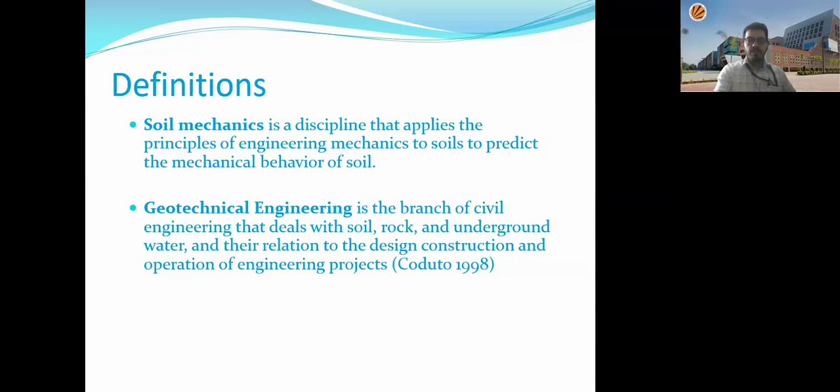So if we talk about a basic geotechnical project, we know there is a construction site. Whenever we want to construct any facility, it's the job of a geotechnical engineer to study the properties of soil. So what he does, he takes soil samples from the particular site, and takes those samples to the laboratory for testing.

After testing, he'll get some properties of the soil, and by using those properties, the geotechnical engineer will design or give some probable foundation analysis, or he'll do some kind of math here to come up with an idea that if we want to construct a particular facility, what should be the size of its foundation or the supporting structure.

Once these processes are complete, only then the structure can be built. So it's a cyclic process. So I'm repeating again. From a probable construction site, soil samples will be collected. These samples will be tested in the laboratory. Based on their test results, a design will be done, and that design will be forwarded to the execution team, and that execution team will actually build the structure on the particular site. This is the basic cycle of any geotechnical project.

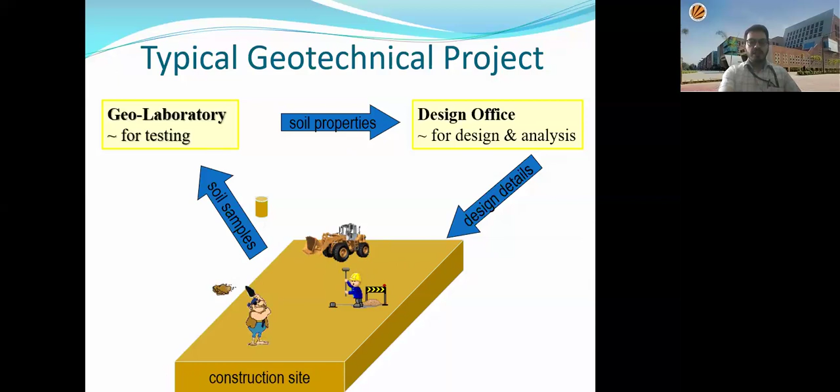Now, let us see some of the applications of the geotechnical field. So the very basic application is foundations. Foundations are what? They are the supports of the structure, and their role is to transfer the structural loads or the weight of the structure into the ground safely. Where the term safely means we don't want the foundation to break while supporting the structure, and we also don't want the soil on which this structure is resting to fail, right?

So this term safely means neither do we want the foundation to fail, nor do we want the soil to fail. So for this, we need foundations. So again, the role of foundation is to transfer the structural weights or loads into the ground safely. So foundations could be of different types. So here I've shown a simple shallow foundation. Shallow foundations, as the name suggests, are small foundations. The depth of these foundations is not very deep.

You can see in this image these small rectangular blocks underneath this simple structure, right? So their depth is not up to the bedrock. I hope you can see the soil profile here. So here, in this zone, you can see a firm ground. This is made up of soil, and underneath it, you have a bedrock. And these small squares that you see here represent the foundations. So here, the foundation is shallow, meaning the extent of these rectangles is not up to greater depths.

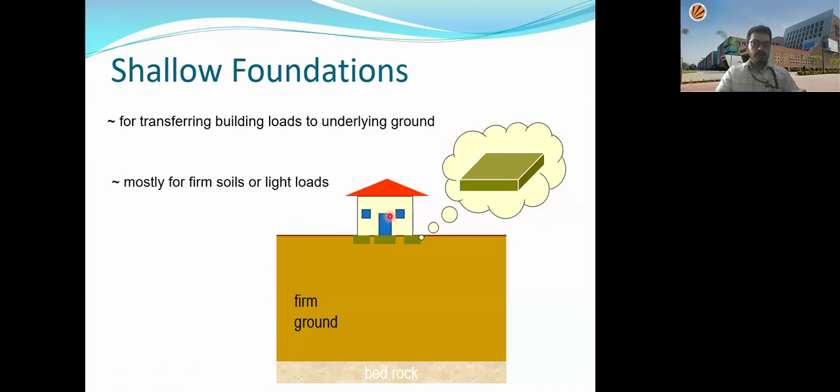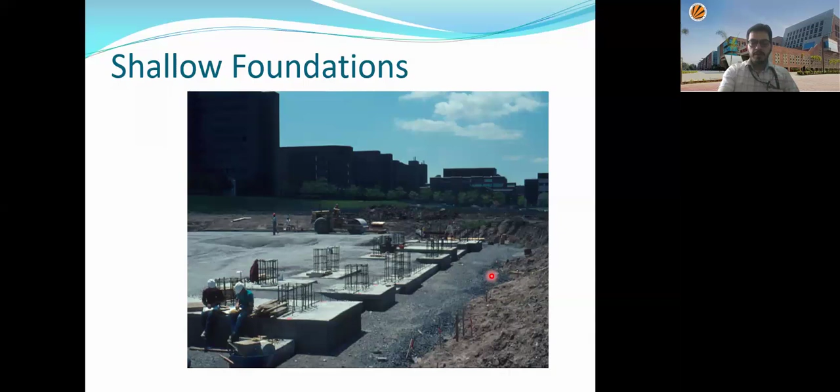And these types of foundations are provided if the weight or the size of the superstructure, in our case this particular house, is not too high. And this is the actual photograph showing the shallow foundation. You can see these foundations. These are examples of shallow foundations. And I hope most of you have seen these shallow foundations whenever there is any kind of construction activity going on around your neighborhood. So if you see here, the shallow foundation.

So this is an example of failure of foundation, and the example is from the Transcona grain elevator. You can see in the figure on the left the structure is stable, but the figure on the right shows the structure has failed. In fact, the structure has not failed, but the foundation has failed. You can see the structural integrity is still there, but the entire structure has tilted. So this tilting means the foundation has failed.

And this type of failure is known as the bearing capacity failure, or in other terms, the foundation was not able to support this structure. The weight of the structure was very high for the particular foundation. So it means we need to understand foundation systems. We need to be very careful while designing these shallow foundation systems.

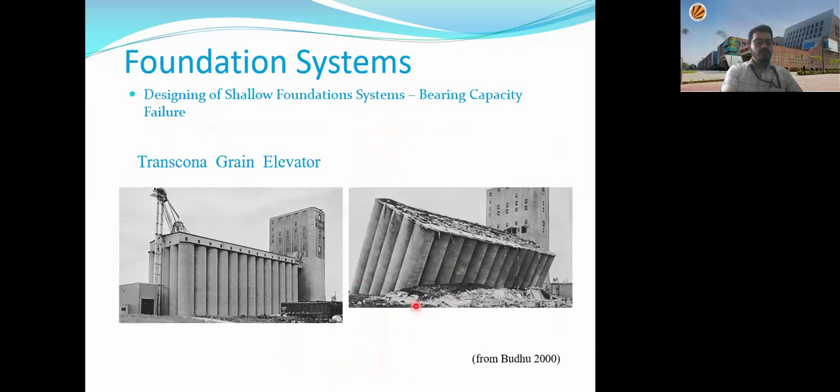Now we have other types of foundations, which are deep foundations, and these are required if we want to avoid these types of failure, because in this case the foundation was incapable of supporting the structure. It means we need to do something to support the structure. So instead of providing shallow foundations, we can provide deep foundations. The role of deep foundations is similar to shallow foundations. They support the superstructure and transfer the loads safely into the ground. But in this case, the loads are transferred to deeper depths, up to the bedrock.

You can see here these vertical lines. These vertical lines represent the foundation of this structure. And you can see the extent of these vertical lines is up to the bedrock. So the load of this superstructure is directly transferred to the bedrock here. And these vertical members, which we call foundations, are known as piles.

So these are vertical cylindrical members. These are very slender members, and their job is again to transfer the load of the superstructure into the ground safely without failing. Means these vertical members will not fail. Additionally, we don't want the soil to fail on which these members are installed.

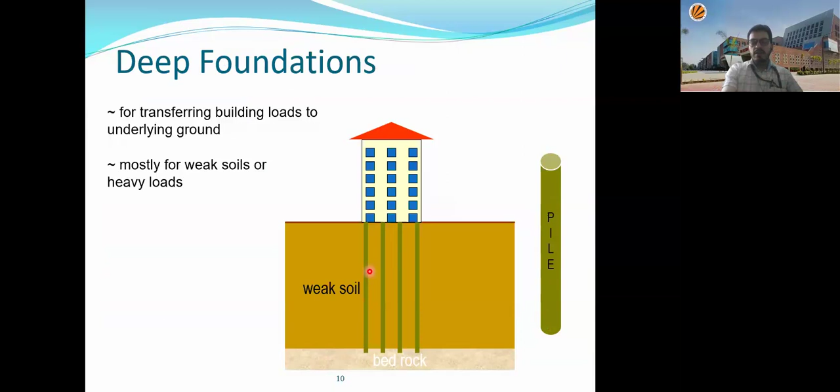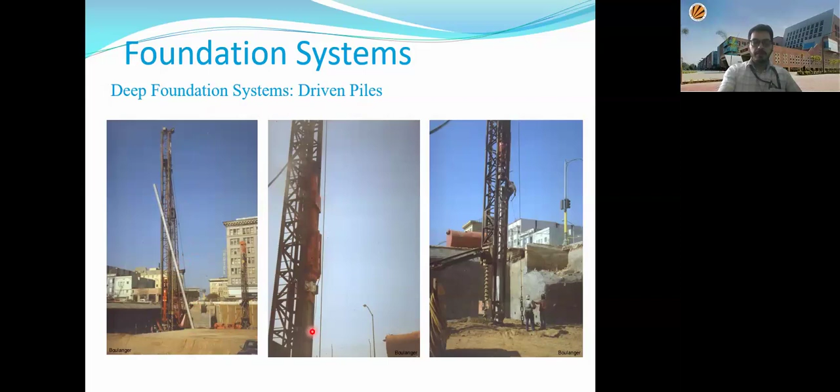And these are some other examples of driven piles. Here, these are timber piles. Okay. So now you must be wondering why I've used the term timber piles here. Depending upon the type of material that we use, piles can be classified. These foundations can be classified. So these could be made out of concrete, which is basically a mixture of cement, sand, and aggregates with water. These could be made of timber, as we can see here, or we can use steel piles. It depends upon the designer, and it also depends upon the cost and availability.

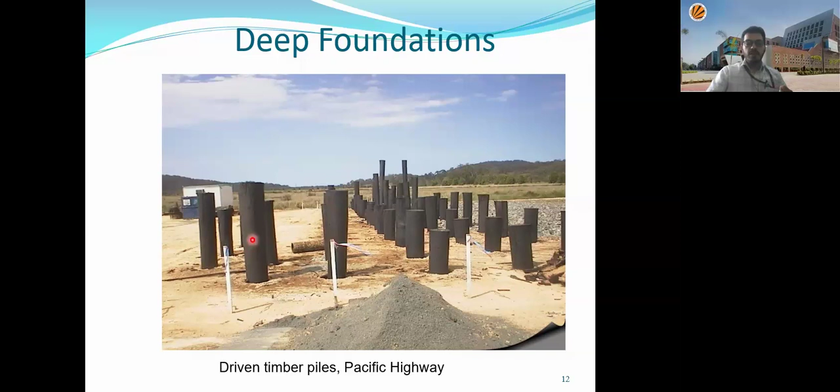Then if we want to install piles or cast piles into the ground itself, means we don't want to use ready-made piles, we want to construct the pile in its place of location. So for that, we need drilled shafts. Means we first have to create a borehole in the ground, and then we'll insert the reinforcement, which is made up of steel bars tied together, and then we'll fill that hole with concrete, which is basically a mixture of cement, sand, and aggregates with some moisture or water content.

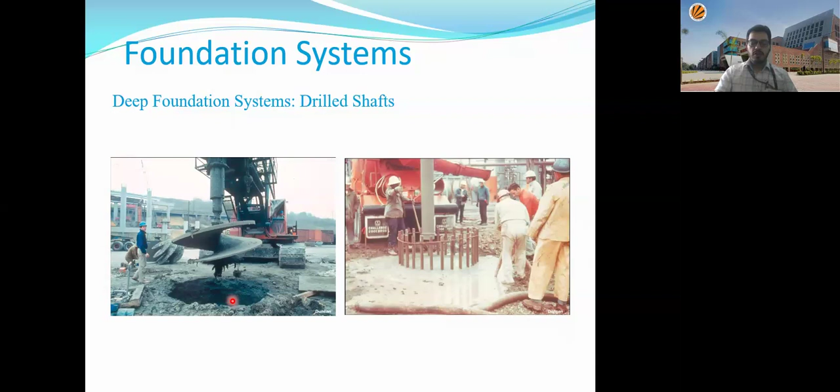Okay? And another example of retaining walls is in hilly regions. Whenever you go to any hilly region and you're going along a road, you will see on the hillside that there are some walls constructed, and their objective is simply to prevent the flow of hillside soil. So they are also preventing the movement of soil which is on the hillside, on the higher side. Those are also retaining walls. So again, the objective of a retaining wall is simply to prevent lateral spreading.

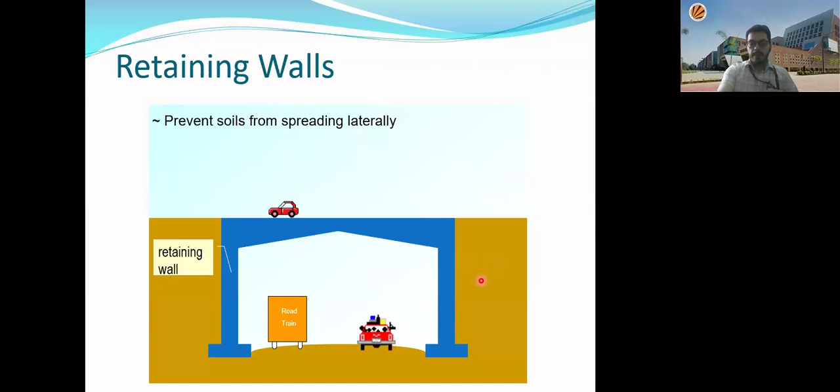Geosynthetics. We use geosynthetics. There are different types of reinforcement. There is not only one single type of reinforcement. There are multiple types of reinforcements, and sometimes we use them for some other purposes like containment. We'll discuss all these things later in this lecture.

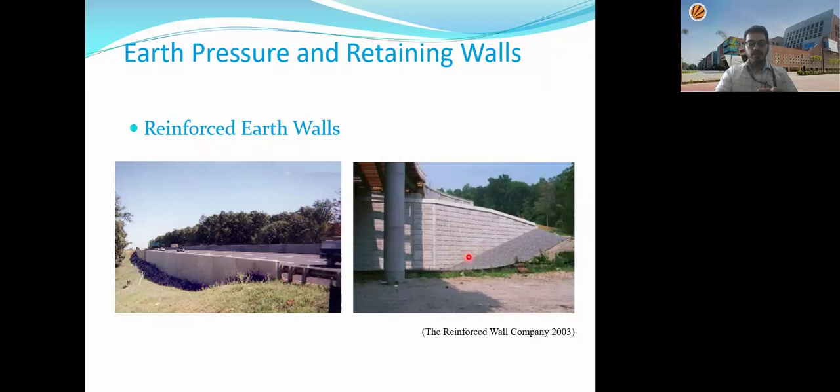We'll fill that mesh with this locally available gravel, and we'll have a bigger sized element which is similar to a brick, but it is contained inside a mesh. And then we'll place these members over one another and make a continuous wall. You must have seen these walls in hilly regions, on highways going through hills. And their objective is to stop the lateral spread of soil to prevent landslides. Lateral spread is actually happening because of landslides.

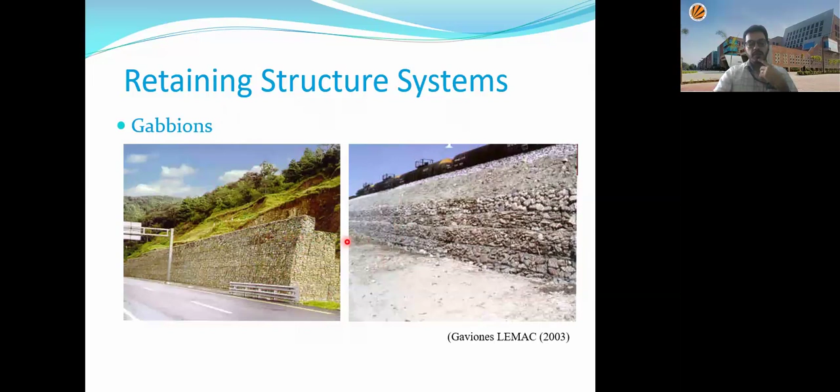Then we have tiebacks. This is another way of providing retaining structures. Tiebacks are simply inserting some nails into these walls, and they go through this wall plus into the soil behind the walls. By doing so, it will increase the density of the soil. By increasing the density of soil, the lateral spread of soil again decreases. So this is the purpose of providing tiebacks.

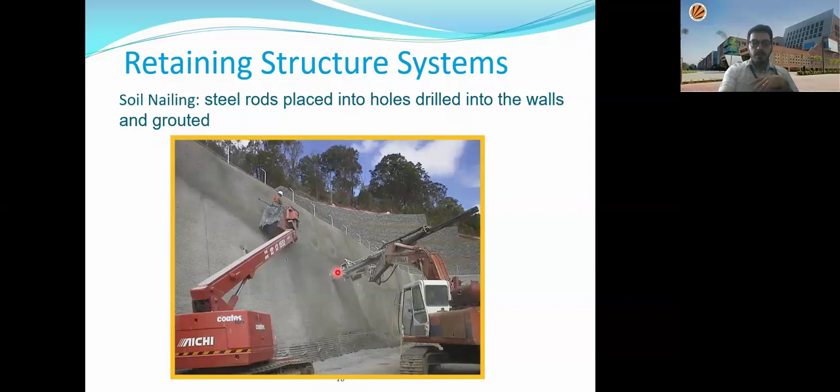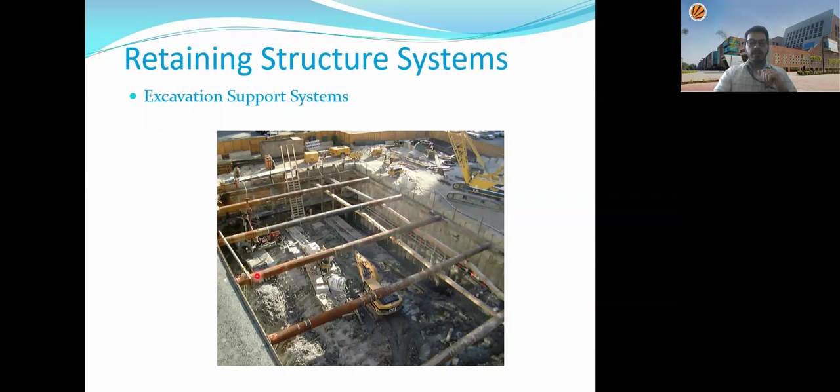And sometimes we use excavation support systems to protect against lateral spread, and these are temporary. These systems are basically used in urban areas when there are very big buildings nearby and we need to do excavations. If we do excavations without providing these excavation support systems, the sides would cave in, and it's very dangerous to the people working inside the excavated region. So we want to protect these vertical sides from caving, and for that we provide excavation support systems.

And one more type of retaining system is sheet piles. These are similar to piles, but these are sheets. Their purpose is simply to retain water on one side and earth on the other side. Depending upon the material, they could be steel, timber, or concrete. But we avoid concrete sheet piles because, due to water movement, we want the structure to be slightly flexible, and concrete is not that flexible. So we generally use steel and timber.

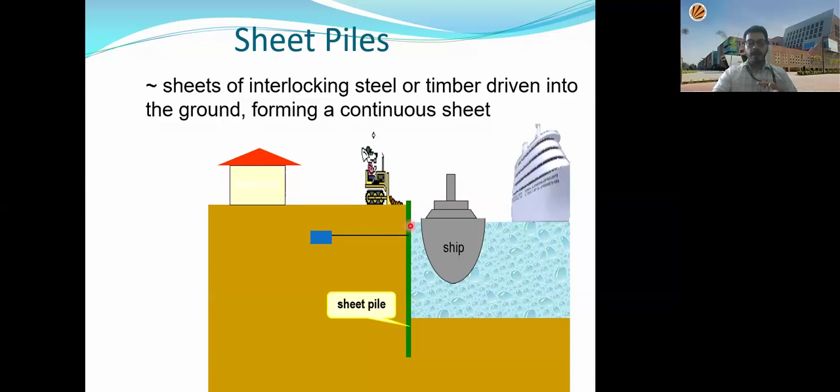These are some other examples of sheet piles. You can see water on the other side, and here the water level is different, right? So from both sides, the water level is different. And these sheet pile walls are for temporary works only. These are not permanent structures, these are temporary structures.

So in case we want to construct anything in a river body or a water body, we first use sheet piles, and then we pump out the water from the center so that the bed of the river or water body gets exposed, and then we can do the construction procedure. Once the construction is complete, we remove these sheet piles.

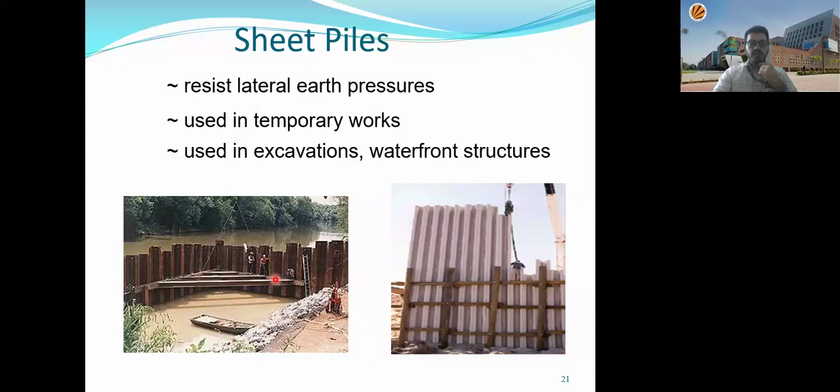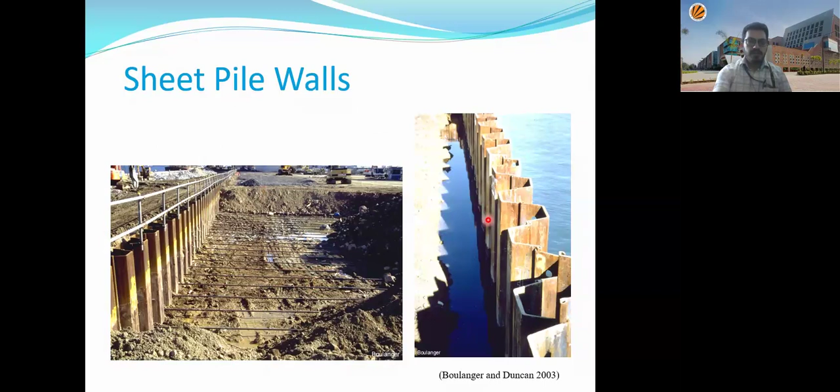These are some more examples of sheet piles. You can see the image on the left and the image on the right. These are all sheet piles. The next term is coffer dam, which is an improvement or the other name for sheet pile walls. So coffer dam, it is similar to a dam. The objective of a dam is to have a reservoir on one side.

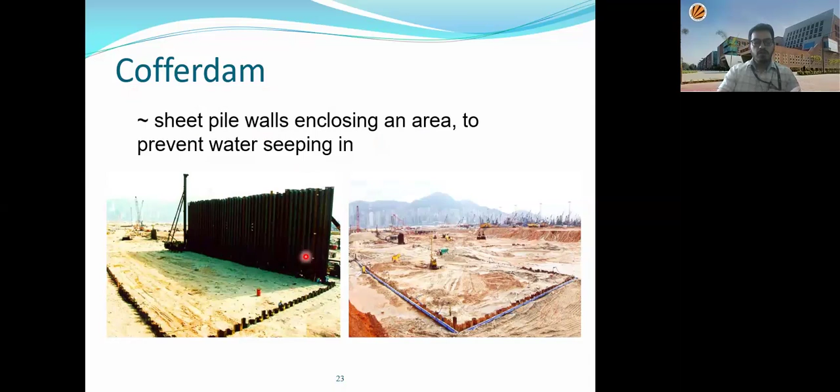And then we'll remove the water from the center by using pumps so that the bed gets exposed. We'll do the construction activity. Once the construction activity is over, we'll dismantle these sheet pile walls. When sheet pile walls are used to enclose a particular area, we call it a cofferdam. If sheet pile walls are not used to enclose an area, we call them simply sheet pile walls.

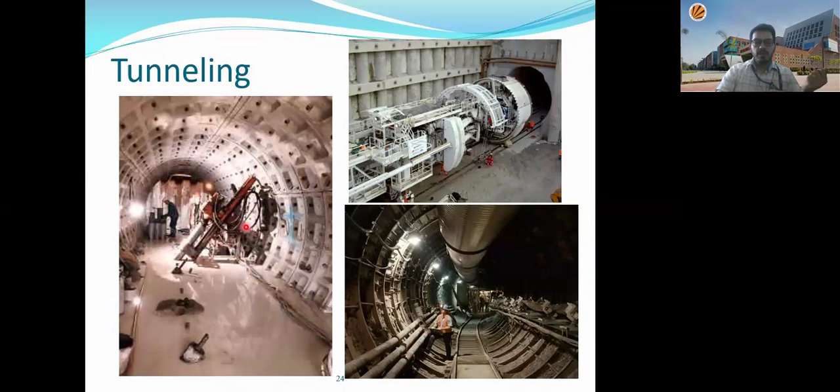Then another application of geotechnical engineering is in tunneling. Right? Tunnels, which are underground conveyance systems. The tunnels may be used for the transport of water, vehicles, and different things. And these also come under the geotechnical field.

Then another application of geotechnical engineering is earth dams. The objective of an earth dam is to simply have a reservoir on one side. And these dams are made up of earth or soil. So it's very important to understand the properties of soil here, because we don't want this water to pass through the dam or over the dam. Therefore, this comes under soil engineering or geotechnical engineering.

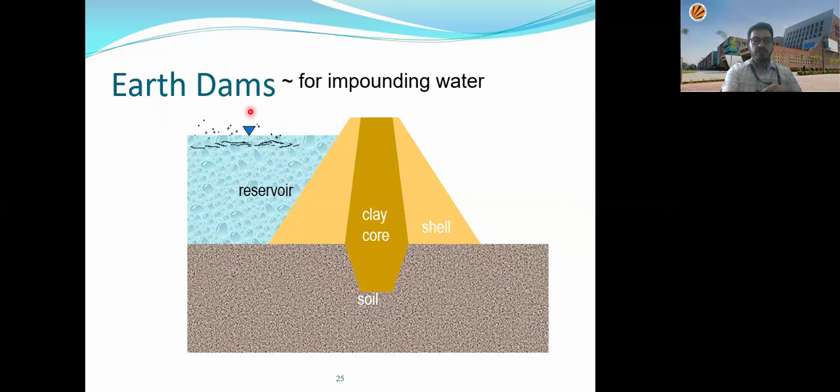Then another application is landslides. As a geotechnical engineer, we can do certain calculations and analysis by which we can predict whether landslides are bound to occur at a particular place or not. There are certain mathematical procedures and coding provisions that we can utilize to predict the occurrence of landslides, and it's very useful.

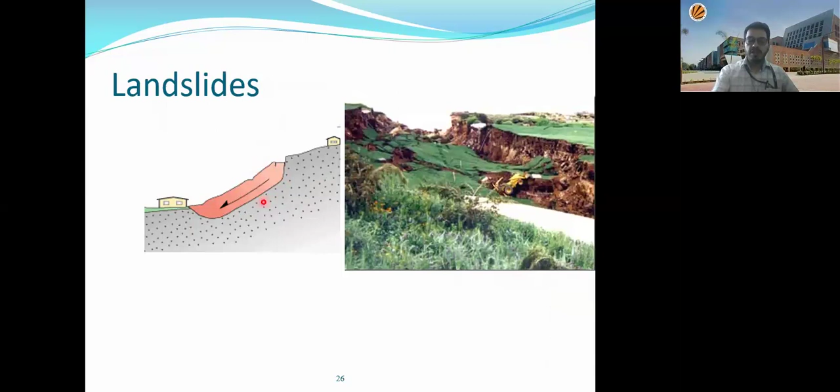Then again, earthwork. Earthwork simply means we are transporting earth material from one place to another. Earthwork also consists of excavation and filling, and we generally use it in road works and highway works.

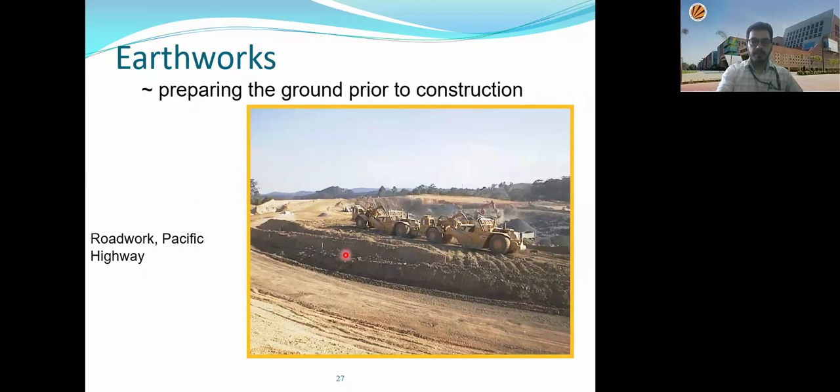Separation means in the soil we'll have different sized soil grains, like sand and gravel. During the construction of a road, if we want to keep sand and gravel separate, we need a layer in between. For that, we provide these fabrics. We call them geofabrics. These can also be used for filtration, as they are made of synthetic material. Water can easily pass through them, but the soil grains will not.

These can also be used for drainage in roads. Sometimes roads become impermeable, because without these fabrics the gravel and sand will mix. The sand grains will fill the voids present in the gravel, making the soil mixture more dense. More dense means the space for voids between soil grains will be very less, so it would be very difficult for water to move through these small voids, right?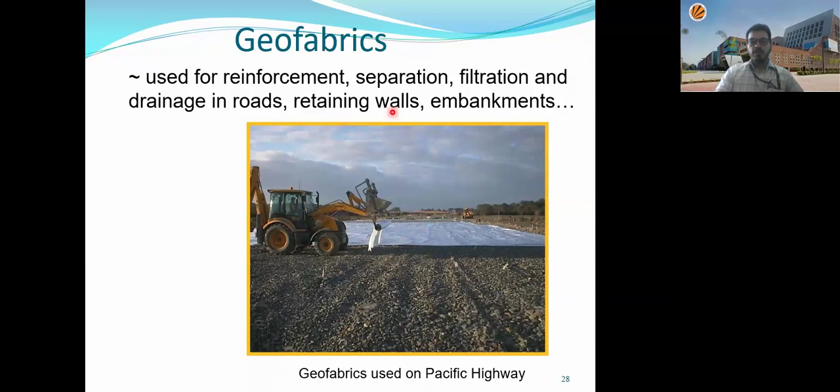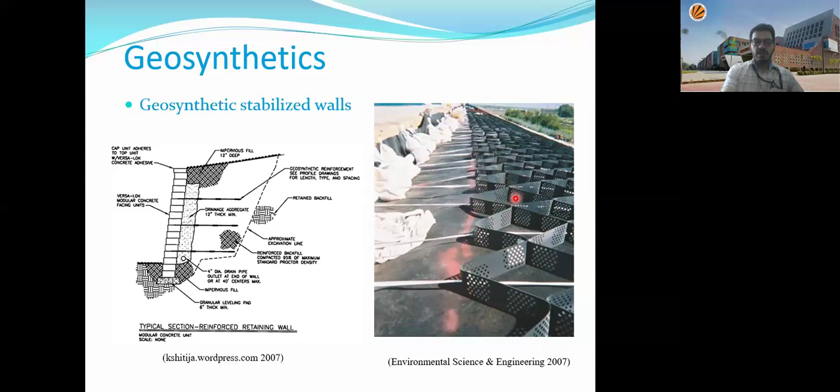These are geosynthetics. You can see these are three-dimensional reinforcing elements. You can see some pockets here. These pockets are formed. We call them geocells because these are different cells. So these are geocells. We fill these cells with soil, right? And eventually, these small cells will prevent the lateral spread of soil. So in general, the provision of reinforcement is simply to prevent the lateral spread of soil.

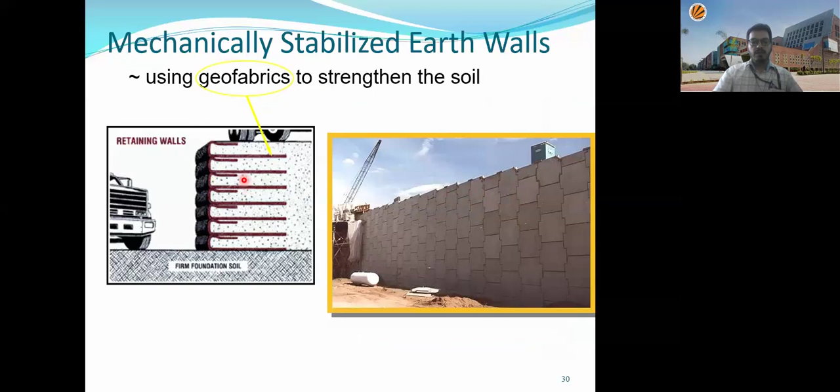And these are mechanically stabilized earth walls. These are similar to reinforced earth walls, which we have already discussed.

So what will happen eventually if the rainwater comes in contact with this system and it seeps into the ground and ultimately comes into contact with groundwater, it will contaminate the groundwater. So we don't want the groundwater to get contaminated. So for this, we need to first understand how much contamination is there, what type of contamination is there, and how to prevent this contamination from spreading. So for that, we have introduced this new field in geotechnical engineering, which is known as geo-environmental engineering.

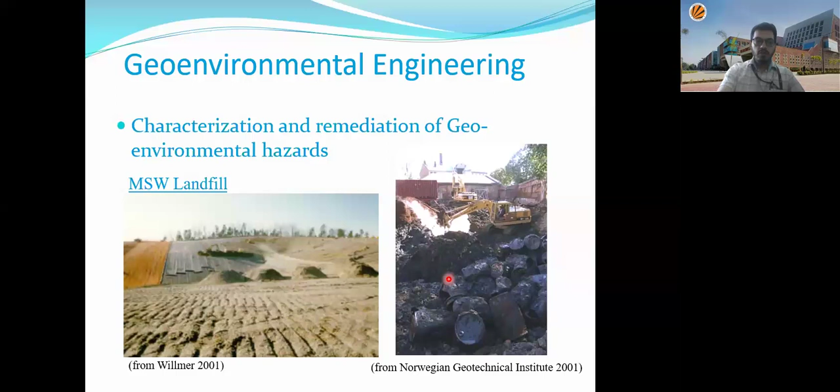And again, the objective is we first identify what types of chemicals are there, which is characterization. And if they're harmful, then we need to remediate these issues. We need to do something to restrict these contaminants from spreading into the ground and ultimately reaching the groundwater.

And this is again a part of geo-environmental engineering; this image shows an example of a municipal solid waste landfill. So if you see in this image, this is the groundwater table, the groundwater which is present in the earth. Above it, we have soil, and this white colored area is your municipal solid waste. And we don't want this municipal solid waste to be placed on ground like this. We want this entire thing to be contained in a particular engineered facility. So this engineered facility is known as engineered landfills.

Right? So here you can see there are different layers. The objective of these different layers is to prevent the leachate which is getting generated from the decomposition of your municipal solid waste to come in contact with this soil and this groundwater. We don't want this. So for that, we need to contain this entire thing in a closed container. So obviously, this is not a container. This is made out of natural materials. We generally use clay here, which is highly impermeable.

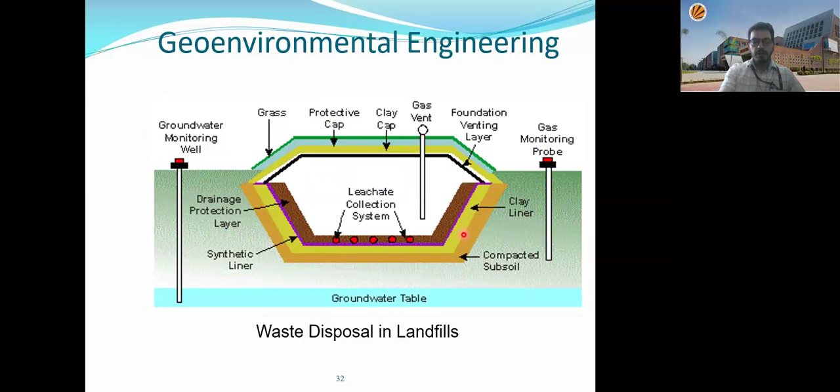So I hope all of you know that if the municipal solid waste is getting decomposed, it will release a large amount of methane gas, right? And there are some foul gases also. So obviously, the people living near these sites will get affected. So therefore, we want to cover this on the top. We want to cover this at the bottom. So this is an example of landfills or engineered landfill.

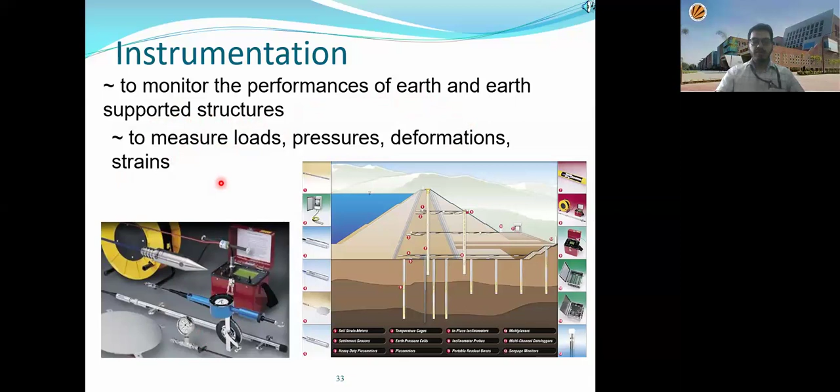Then comes the instrumentation. Instrumentation means the different testing equipment that we use to get the properties of soil and understand the behavior of soil, all these things. So the objective is to monitor performances of earth and earth supported structures. Earth stands for the soil, and its supporting structure could be the foundations, etc. And the other objective is to measure loads, pressures, deformations, and strains. So these are some devices that we use to monitor the performance of these geotechnical structures.

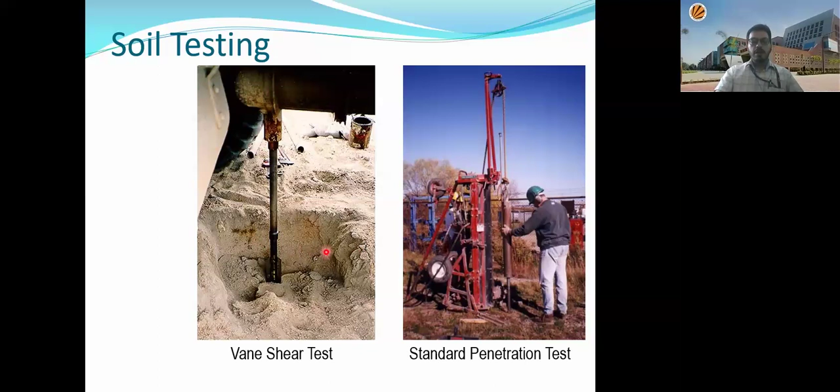For this, we need to do some soil testing. Right? Soil testing, these are few examples. One is vane shear test, second is standard penetration test. These are some typical geotechnical tests which we conduct to check the load carrying capacity of soil.

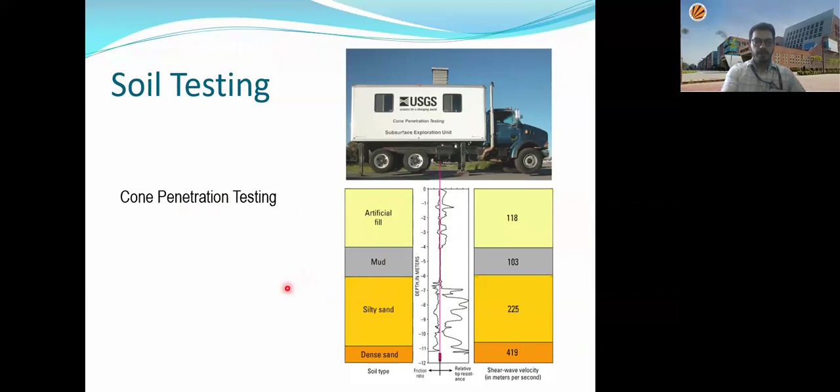Now comes the challenge part, the different types of hazards that geotechnical engineers may face. So the first type of hazard is how will the groundwater condition impact the engineering project? So a very good example is Teton Dam failure, which took place in 1975. Because of groundwater fluctuations, the water level behind the dam fell rapidly.

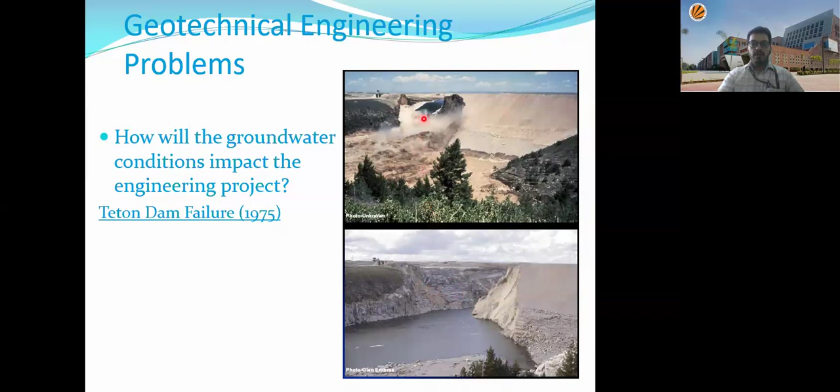Because of that rapid drawdown, the properties or the behavior of the structure was not assessed during the design phase, and therefore this was a catastrophic damage.

Another example is what will be the impact of excavations, grading, and filling. Right? So if we do excavations near any existing structures, there are chances that the existing structures may get affected. So we need to understand this concept also. We cannot do excavations near any existing structures. Excavation means large excavations. So always try to avoid these large excavations.

But if there is a need of large excavation, you must consult a geotechnical engineer first and check his guidance whether excavation is possible. Obviously, he'll provide certain solutions, how to do these excavations, what type of excavation support systems will be required.

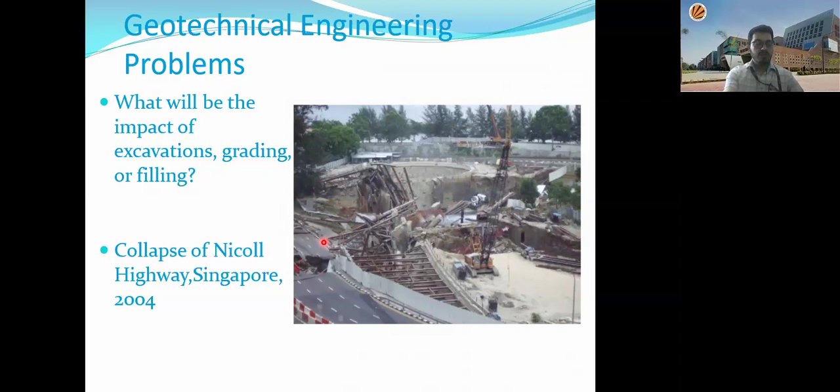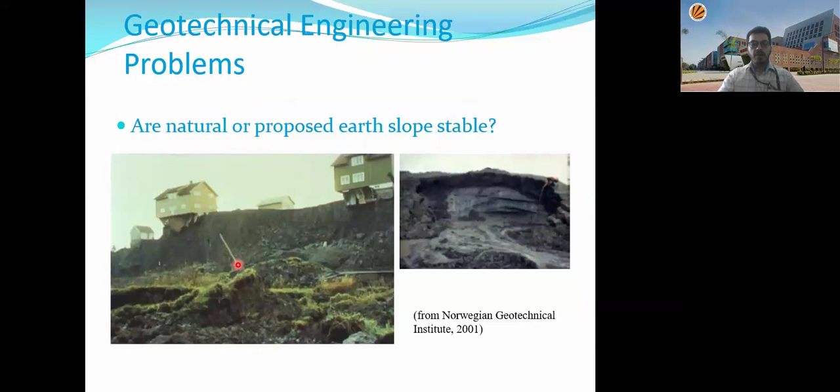One more hazard case, the natural or proposed earth slope, whether it is stable or not. For example, the landslides. Most of the rainy season, we hear that landslides are a frequent phenomenon. It's because of the presence of water in the soil, which kind of increases the lateral spreadability of soil. Or in other words, it will reduce the strength of soil. If the strength of soil is falling, obviously the soil will fail. Landslides are a kind of failure of soils.

And obviously the effect of natural phenomena like earthquakes. Because of earthquake, if the geotechnical studies are not done properly for any structure, the result could be like this in these two images. You can see the structural component is very good. Structural integrity is there in both of the pictures. But you can see very clearly the entire structure has tilted or fallen.

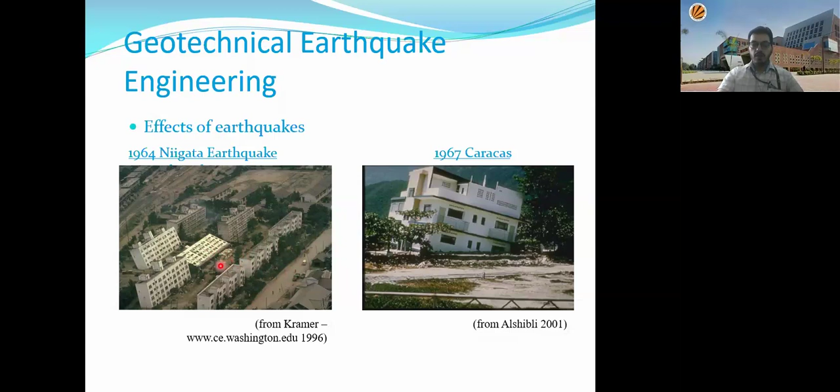Now, what are the solutions? If these kinds of things are there, what are the solutions? Obviously soil is a material. Every material has a threshold capacity. If the threshold capacity is reached, then how to prevent the failure from occurring? So for that, we have solutions. We can go for ground improvement.

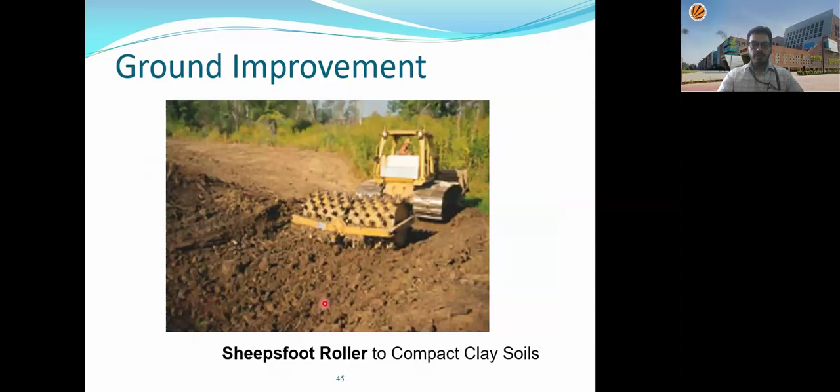Ground improvement means, in this case, we're using a sheepsfoot roller. You can see these rollers. The objective of these rollers is to compact the soil. After compacting, what will happen? The soil grains will come closer to each other, making the soil system a denser system. The denser the system, the more strength the system will offer. Right? So depending upon the type of soil, you can use different types of rollers.

So these are compaction techniques. In this image, you can see these are tamping techniques. Very big weights are lifted and dropped onto the ground. And you can see these craters are getting formed, here also in this image. So it's clear that the soil is getting compacted. The soil grains are coming closer to each other, thereby making the system a denser system, and obviously increasing the load capacity of this soil.

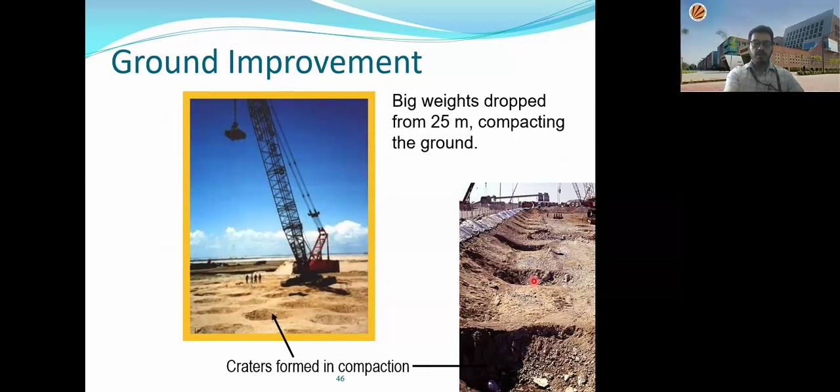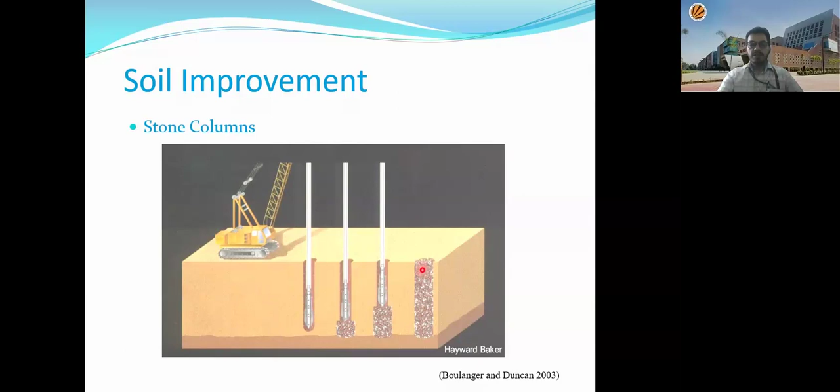Another way of improving the soil is using stone columns. Right? So what we do, we'll make a borehole, we'll start to add stones in it, we'll compact those stones. Right? Means initially it was soil alone, whose strength was weak, and we want to improve its strength. We reached this stage. There was a hole, we made a hole, we filled that hole with stones, we compacted those stones, thereby increasing the density of the soil there. It will increase the load carrying capacity.

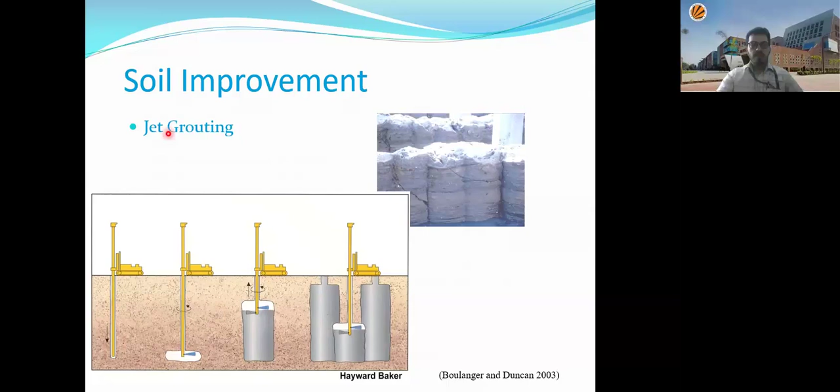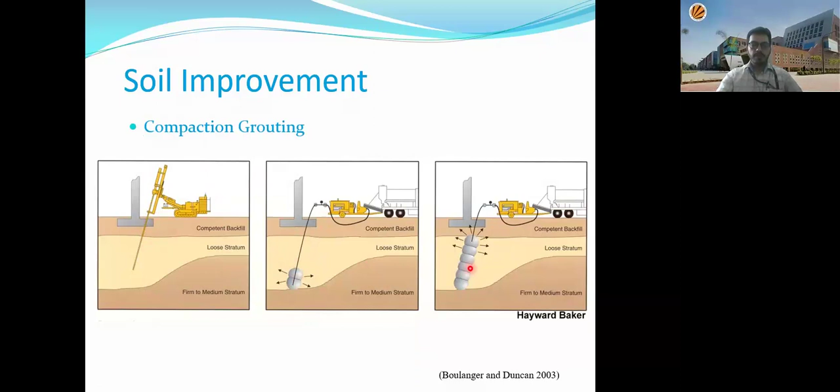Now here in place of stones, we're using cement. Okay, we're using cement. This is grouting, creating a hole in the soil. Then one more compaction technique. Okay, we can use these nails to increase the compaction or increase the density. We can insert some admixtures like this and like this. So again, the objective is to increase the density of soil. We can also use chemical injections. We can inject different types of chemicals to improve the load carrying capacity of soil.

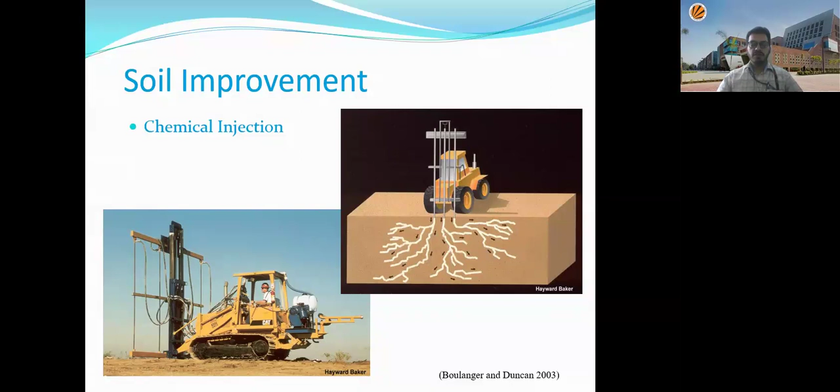Right? So it means we have some ways by which we can increase the strength of the existing ground. So by improving these strengths, we can make the construction of different structures possible. So therefore, we shouldn't wait till the last minute, because once the structure is constructed, it's very difficult to improve the soil properties. But still, there is a way to improve the soil properties even after the construction of a structure.

But that doesn't mean we should not consult a geotechnical engineer before the construction. So it's always advisable to consult a geotechnical engineer before starting a construction, whether I will be able to construct my facility over here in the existing conditions, or do I need some kind of modifications?

So this slide is instability terrains like landslides. We can use retaining walls here. We can use some dams. We can use it as a foundation of structures. We can use them on embankments, some water tanks. We can use them in marine structures, and we can also use geotechnical engineering in oceans. Right, so it has a wide range of applicability in terms of infrastructure. So all of these structures, they all are resting on the ground, obviously.

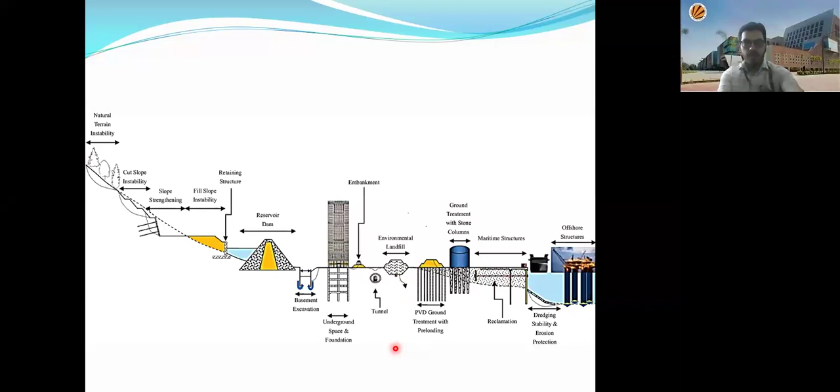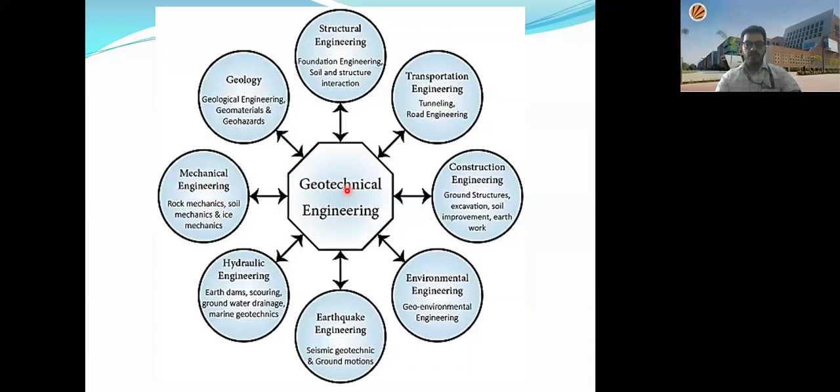So we need to understand behavior, and these are some of the disciplines. Structural engineers need the input of geotechnical engineers. Similarly, transportation engineers also need the input of geotechnical engineers. Construction engineers, environmental engineers, earthquake engineers, hydraulic engineers, mechanical engineers, and geology engineers.

Right? So from this particular lecture, I hope you get an idea that geotechnical engineering is a very important aspect of civil engineering. Civil engineering is not only about the big structures, it is also about the soil, which is invisible to every one of us, because the role soil plays is very important. It is actually the support of any structure. If the support is weak, the structure will definitely fail. Right? So we, as civil engineers, we believe in hard work, and we also play hard.

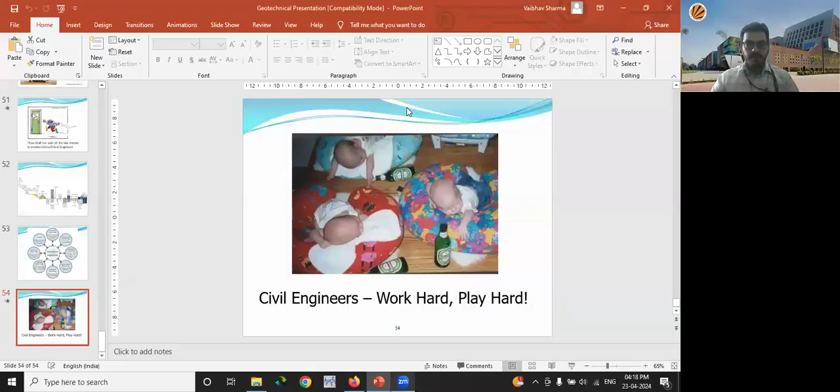Vaibhav. So it was a wonderful delight to discuss typical geotechnical projects, shallow foundations, deep foundations, foundation systems, retaining walls, retaining structure systems, earth dams, and many more.

Moving further, this is the infrastructure of LPU. You can have a look at state of the art infrastructure, indoor stadium with capacity of more than 2,500 people, labs, library, Unimall is there. You can get all your basic needs fulfilled from here, right from essential needs, gymnasium, bowling area. We also have a 50-bedded hospital in our university. Lush green campus. You can have a look at our campus aerial view, and we have been awarded the Green and Clean Campus Award as well.

Now let's go live and discuss the eligibility part, fee structure. Just give me a second. Yeah, I hope my screen is visible. Now you might be thinking how you can check all these details. For that, you need to go to www.lpu.in. When you go to www.lpu.in, you need to go to admissions. From there, you need to click on 12, and then under 12, you need to select your discipline, that is engineering, right? Under engineering, these are the specializations, the streams we are offering. So we are talking about civil engineering. I have selected civil engineering.

Now there are two options available. One is BTech Civil Engineering, 4 years degree, 8 semesters are there. But then we have BTech in Civil Engineering, 2+2 with international credit transfer option. Here what extra is there? 2 years you will be studying in LPU and will be paying in Indian rupees. And for next 2 years, you will be studying abroad with our partner university. Your credits will be transferred to that particular university. And in addition to that, you will be getting your final degree from that university abroad only.